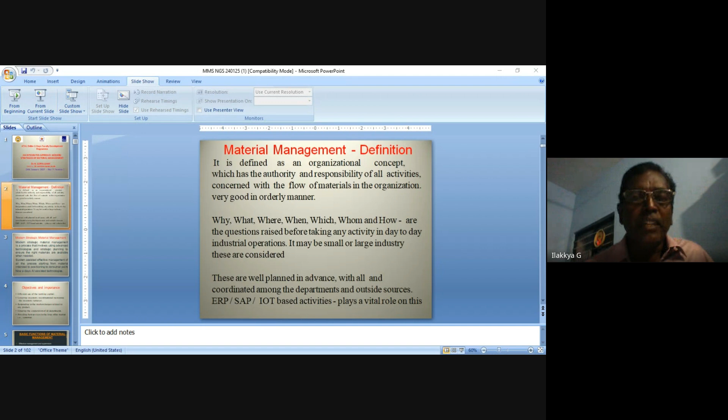Materials management definition: it is defined as an organizational concept which has the authority and responsibility of all activities.

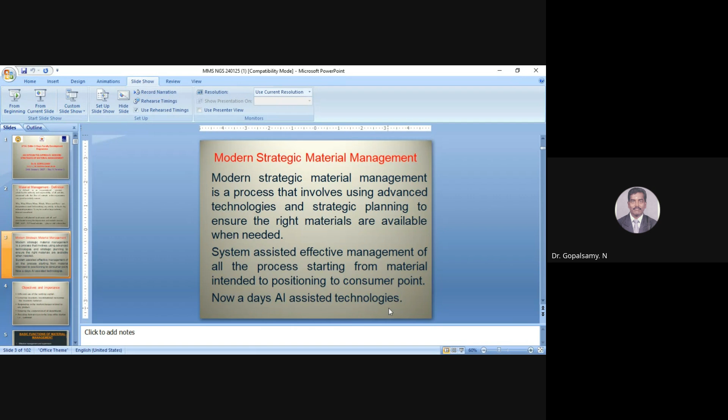Objectives and importance: efficient use of working capital, lowering inventory investment and increasing inventory turnover, responding to market changes related to any product, ensuring cooperation of all departments, and providing best service to the king of the market, that is, the customer is king.

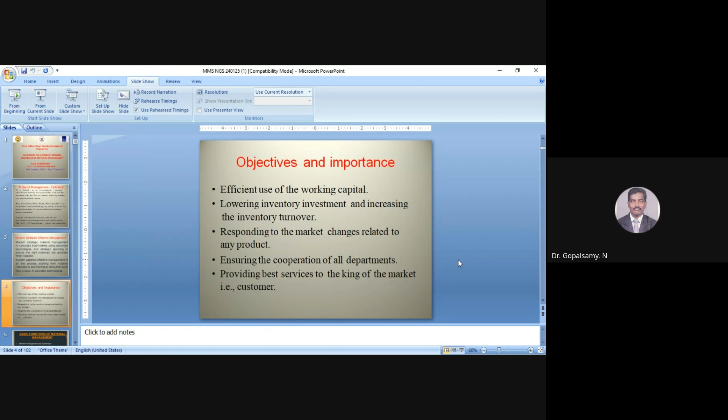Objectives of material management: right price, high inventory turnover, low procurement and storage cost, continuity of supply, consistency in quality, cordial relationship with suppliers, development of vendors, good information system, low storage cost, and good records.

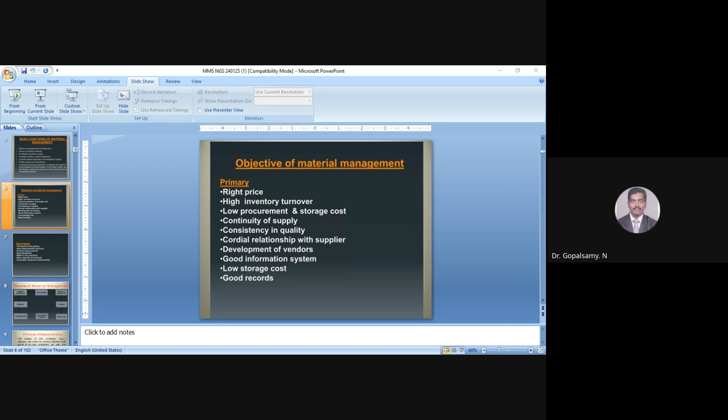Demand estimation: the demands are received from all departments, consolidated together, and given to the materials or procurement department. Procurement is the activity of the materials management department, and it is forwarded to the suppliers through inquiry mode. Nowadays we have many types of inquiries, using email, WhatsApp, Facebook, and advertisements.

Earlier, it was only newspaper and letter correspondence.

Then after procurement comes receipt and inspection. Proper inspection is to be carried out based on specifications and requirements. Only accepted components are to be sent to storage, done by stores personnel in a proper manner through proper records.

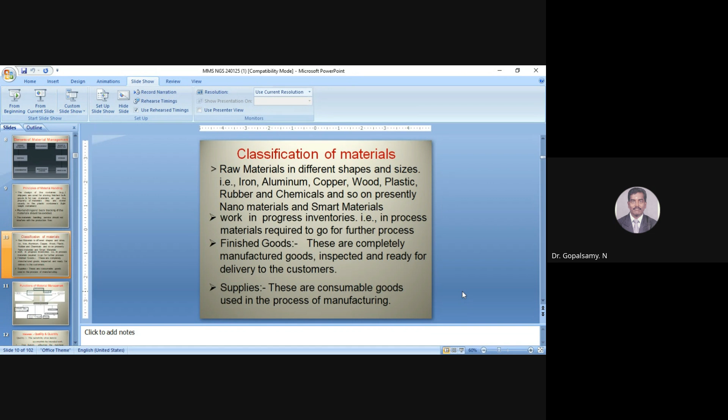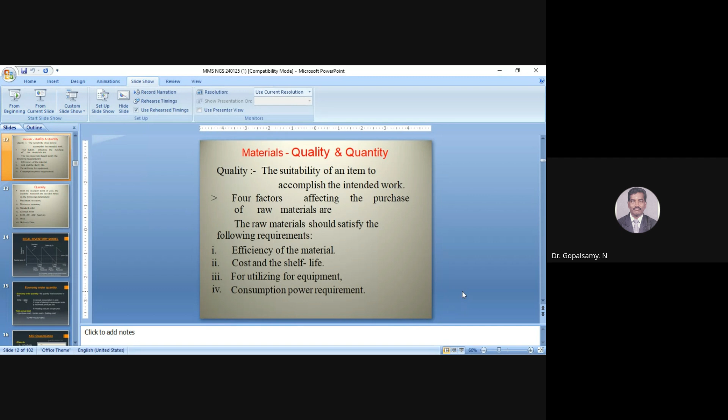Quantity: based on the quantity, maximum inventory and minimum inventory, standard orders, reorder point, economic ordering quantity, just in time, ABC analysis, price and delivery dates. These are the essential terms to be considered defining the quantity.

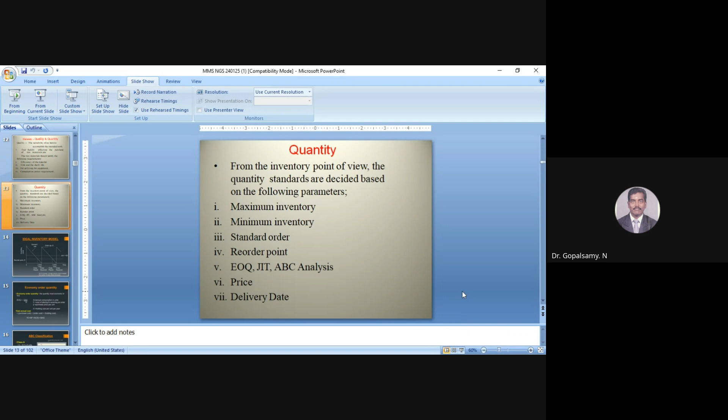Ideal inventory model: this is how much demand is required and when it is to be ordered, what is the reorder point, order placed, what is the lead time for the production, and how many numbers per order to be placed can be accumulated together if the value of the order is small, and all the items to be ordered in a stretch, giving the split deliveries.

Economic ordering quantity: the quantity most economic to buy is decided based on this. EOQ is equal to root of 2AC divided by H. A is annual consumption in units. C is the cost of placing and receiving an order, that is purchasing order, releasing and receiving the order material.

P is purchase price per unit. H is the holding cost per unit per annum. The total annual cost is equal to purchase cost plus order cost plus holding cost.

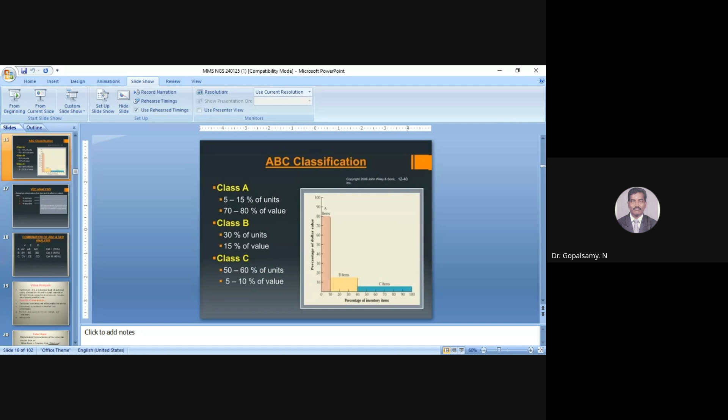VED analysis: nothing but vital item, essential item, desirable. Vital means it's important to be brought in time. Essential, it is a must. Desirable, it may be put or may not be.

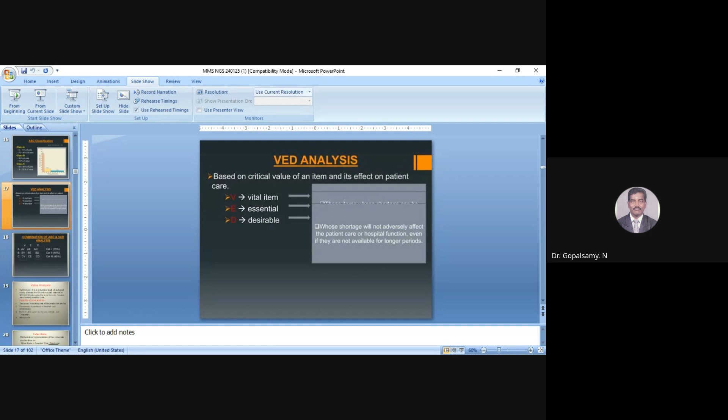Value analysis: it's a systematic study of each and every element of its cost in a part, material or service, to make certain that it performs its function at the lowest possible cost.

Benefits of value analysis: decrease in existing cost of the product or service. Unnecessary expenditure is identified and eliminated. Product value improves for new materials and process, resulting in more profits.

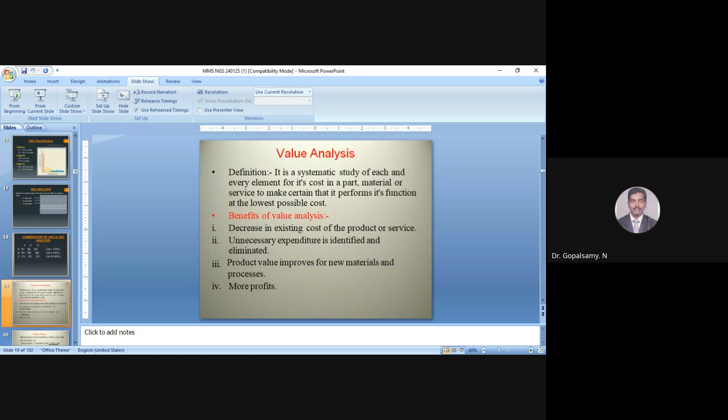In this technique, many number of questions are applied. What must I do? What else does the item do? What does it cost? What else will the job do? What will be the alternative costs?

This is based on the material or component we are going to utilize for the purpose, and for which what I have to do and how much value it yields for the specific operations, and based on this, the value analysis technique is carried out.

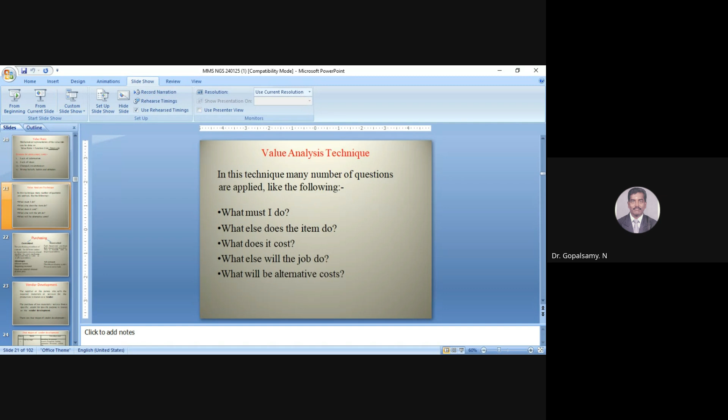Vendor development: any component required to be developed is given to this department, and it is a challenging opportunity for the engineers who will go for vendor development in the materials department.

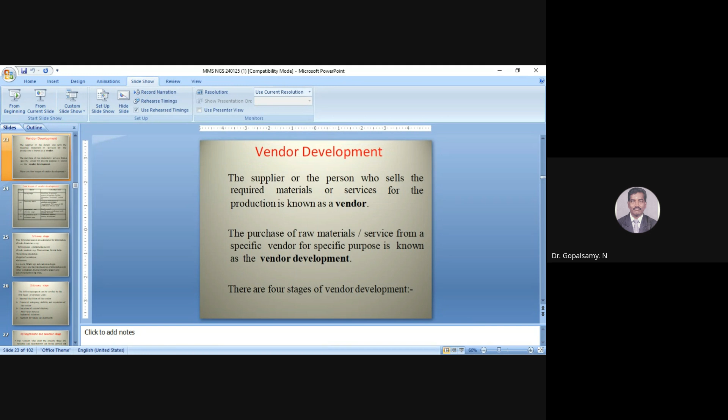The service or sources given to us: four stages of vendor development are survey stage, inquiry stage, negotiation and selection stage, experience and evaluation stage. Survey means identifying the potential sources.

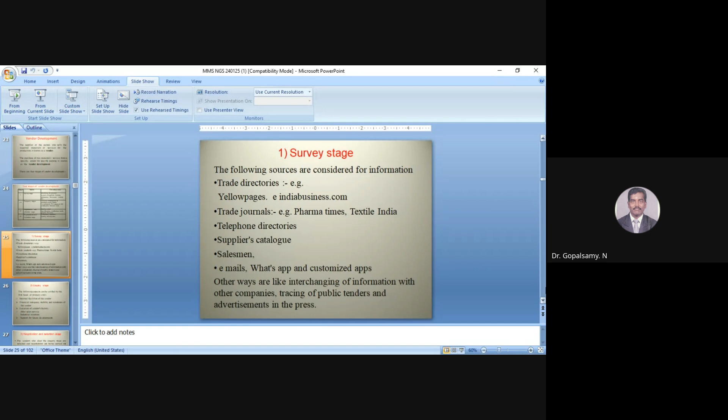Enquiry stage. The following aspects can be verified first-hand at primary visit: internal facilities of the vendor, financial adequacy, stability, and reputation of the vendor. That is, how sound they are to withstand the financial burdens for the suitability and supply to us.

Location of vendor factory, whether it is nearby or far away, how often we can visit, that is to be decided. After sale service, industrial relationships, support for future developments. If any new ideas or components are to be developed, it will be given to the particular specific vendor for the development.

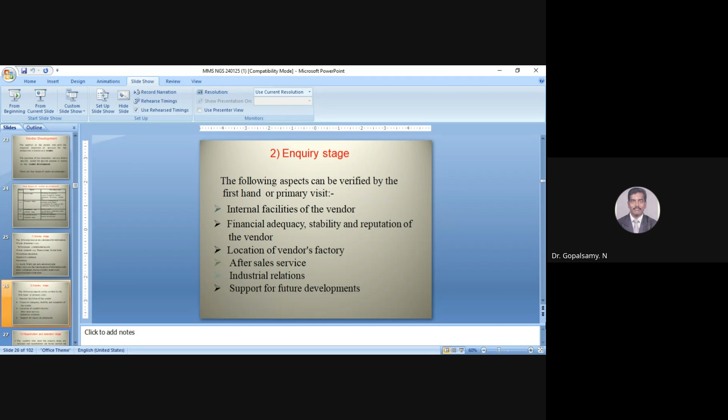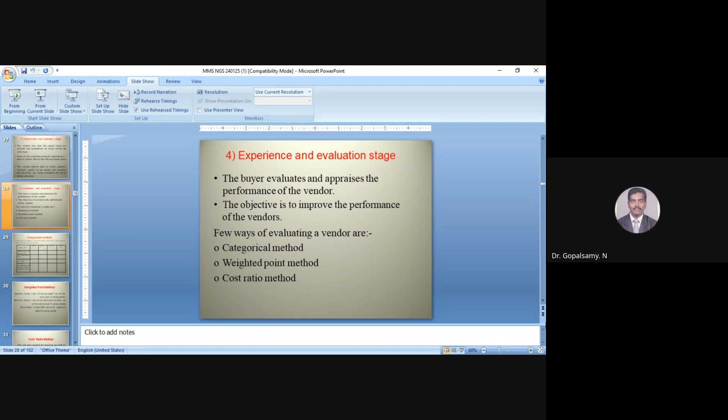Experience and evaluation. The buyer evaluates and appraises performance of the vendor. The objective is to improve the performance of the vendor. A few ways of evaluating vendor are categorical method, weighted point method, cost ratio method. Categorical method is purely decided on the grade point, that is grading factors.

Supplies are as per quantity selected and deliveries are on time. Rigorous follow-up is not necessary and willingness to accommodate when product schedule production suddenly changes is considered. These are graded with always, usually, seldom, never. Point grades are given: 9-8-7 for always, usually 6-5-4 is medium and seldom is the minimum category, then never is 0. The points will be given accordingly and summarized to decide the factors to proceed further on vendor or not.

Weighted point method, that is quantity rating: number of lots accepted per lots received into rating points. Delivery rating: number of lots delivered on time over number of lots delivered, into rating points. Price rating: least offer received over supplier's offer into rating points.

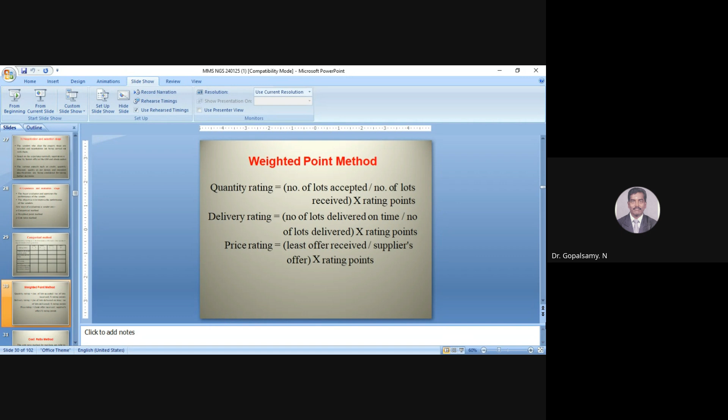This is the cost ratio method. Cost ratio method is where purchase can refer to the cost of sale ratio, the variable cost ratio or cost benefit ratio. This ratio can help determine a company's profitability, the viability of a project, or the cost effectiveness of the purchase.

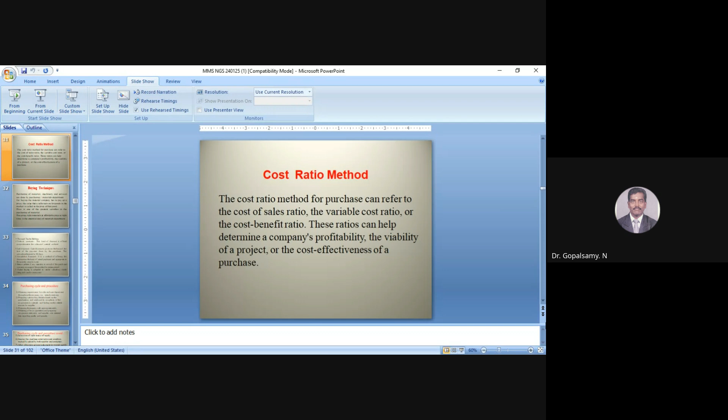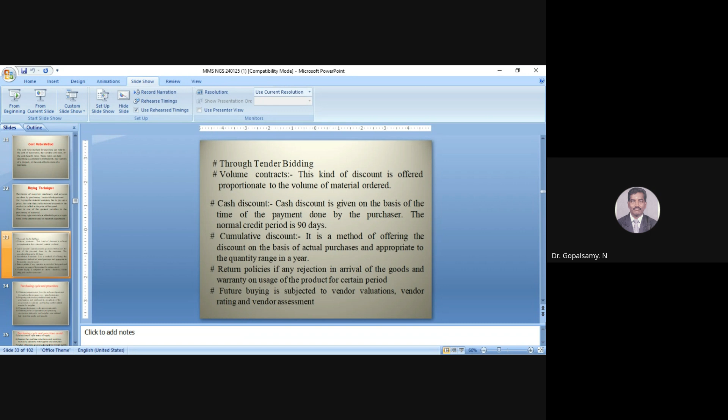Based on the quantity, through tender bidding, volume contracts, cash discount, cumulative discount, return policies, future buying, subject to vendor valuations, vendor rating, and vendor assessments. This cash discount is mainly given.

Purchasing cycle and procedure: obtaining requirements from the user department, that is intends receiving, prepare make or buy decision based on the specifications and needs of the complexity of the components or materials, and finding reliable sources, preparing the inquiry with appropriate needs, obtaining offers or quotations, preparing comparison statements, and supplier-wise statistical data regarding quality and quantity are recorded.

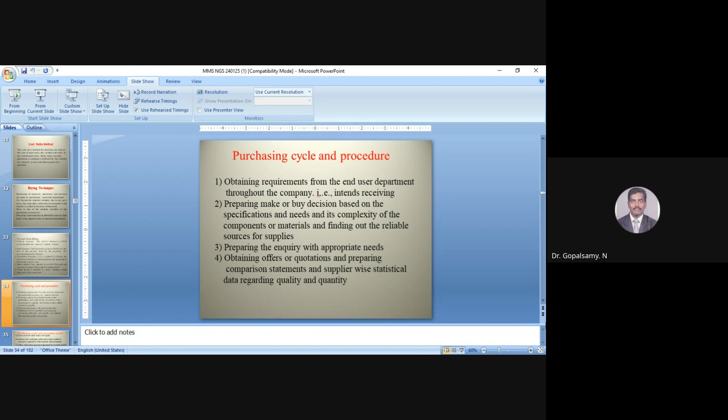That is need recognition. Each and every department will give the requirements with specifications based on the design, and it is given to the materials department through official requisitions.

Specification files and specifications are checked, and further it is sent for inquiry. Based on the inquiry reply received, that is quotations or offers, the supplier will be finalized based on the past history, quality and quantity of supplying, and their finance terms. Based on the purchase, all these records are stored, and suppliers' records are maintained by the materials department.

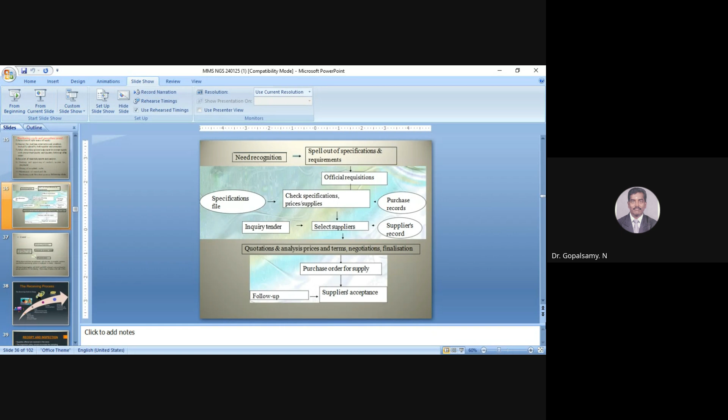The receiving process: the receiving clerk in charge will first, based on the order, give the receipt, check for the quality, and it will be given to the quality control department.

All the things are recorded and submitted to the purchasing department and given for payment. The invoices are sent to the accounts department after the acceptance of the quality.

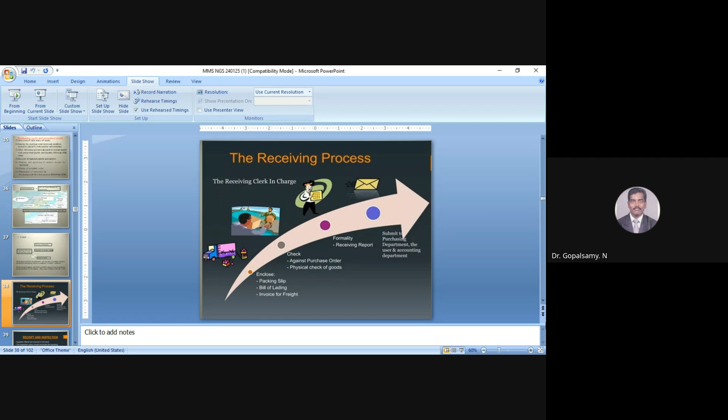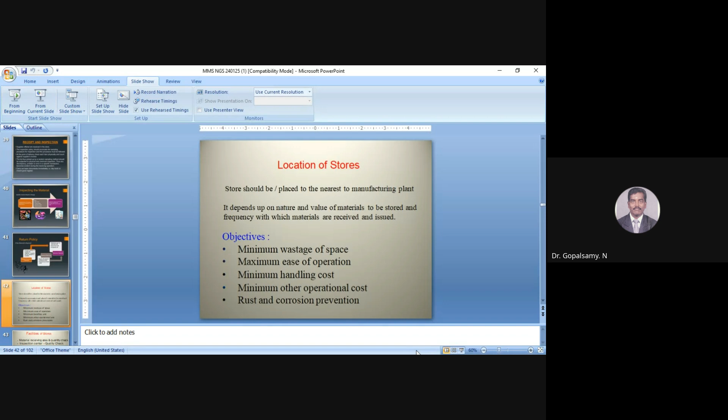Functions of stores - general functions: maintenance of stock, maintenance of hygiene and sanitation, pest control, rust preventive measures, and safety needs. First aid kits with trained personnel and firefighting equipment are maintained with stores.

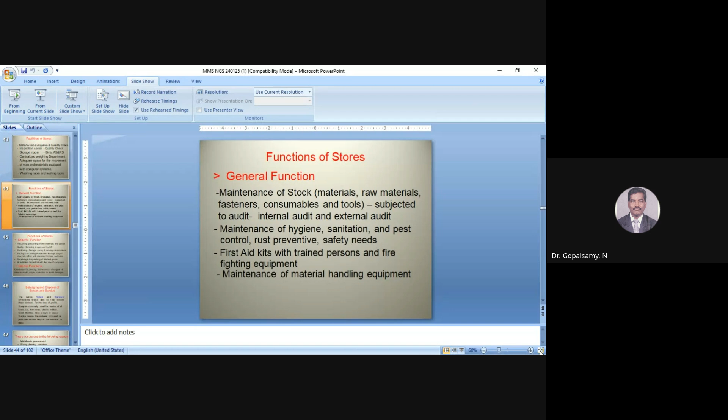Maintenance of material handling equipment. In this, maintenance of stock is subjected to audit.

Some specific functions of stores: receiving and recording raw materials and goods, quality sampling and approval by QC, positioning, storage, array and moving rack systems, issuing and recording of materials through proper channel with standard formats and rules, and receiving and dispatching finished goods.

All these activities are carried out with the use of computers. Optimal functions include distribution, dispensing, and maintenance of weights and measures with proper protection to avoid damages.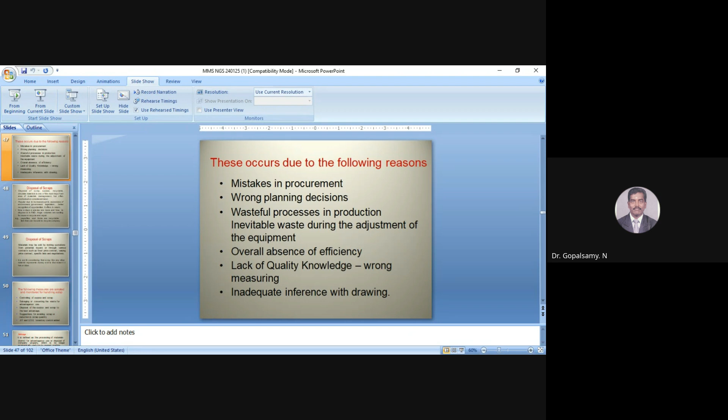loss to the company. Then they will be searching for the component. It's not possible to trace out, so they will go for a new process. Wrong positioning - this is controlled by computer planning. Disposal of scraps.

Surplus, recyclable, obsolete materials are the most important area of materials management, but often overlooked and considered minor. Popular due to increased public awareness of environment, government legislation, and better recognition opportunities it offers in return. Nowadays, e-waste is more, and how to dispose is in R&D. Huge volumes are waiting for reuse, recycle, or repair.

Example: paper files and forms are recyclable items that can be sold to recycle companies. Plastic wastes are used for recycling. Disposal of scraps: metals may be sold by inviting quotations from potential buyers through various contracts such as fixed price contract, varying price contract, specific bids, and negotiations. It is worth considering that scrap, like any other material, represents money, and to that extent it has value.

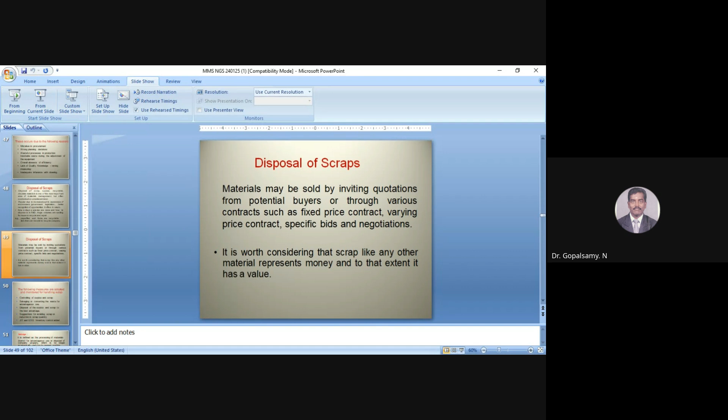Disposal is the main activity in the area of the stores department, mainly concentrated on this. The following measures are adopted: monitored handling of scrap, controlling of surplus and scrap, salvaging and converting waste for advantageous use, disposal of surplus scrap to the best advantage, suggestions for avoiding scrap or reduction in scrap quantity.

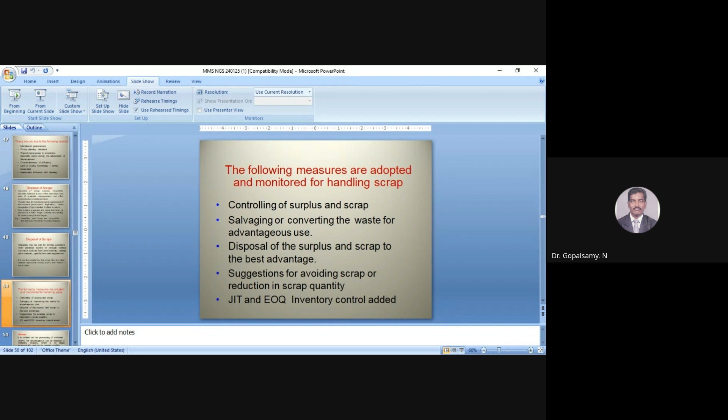JIT, EOQ, and inventory control are added. Just in time and economic order quantity play a vital role. Salvage is defined as the processing of materials for advantageous use or disposal by a company properly. It is no longer economically useful in its present position, so it is to be salvaged.

Salvage operation: waste materials are properly collected and stored in one place continuously so that these can form a separate batch in production. Recoverable materials are stored in a scientific way. Other items are stored too. How to go for salvage? That is the material handling system.

It involves handling, storing, and controlling material movements with proper records. The raw materials, in-process materials, and finished goods are moved from one place to another inside the plant with proper records. It adds value through time and place utility. It impacts space requirement, profits, quality, safety, and productivity.

On an average, 20% of the production cost is spent on the material handling system. Mainly, material handling is the main activity. Any movement of materials is performed or done by this material handling system.

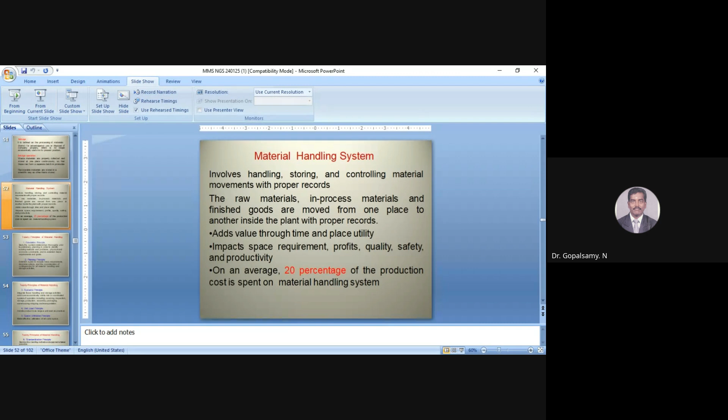Nowadays, technologies are improved with automated vehicles and remote control vehicles. More logistics methodologies are followed. The transfer system line is also there.

20 principles of material handling. Orientation principle: study the system relationship thoroughly prior to preliminary planning in order to identify existing methods and problems, physical and economic constraints, and to establish future requirements and goals. Planning principle: establish a plan to include basic requirements, desirable options, and the consideration of contingencies for all material handling and storage activities.

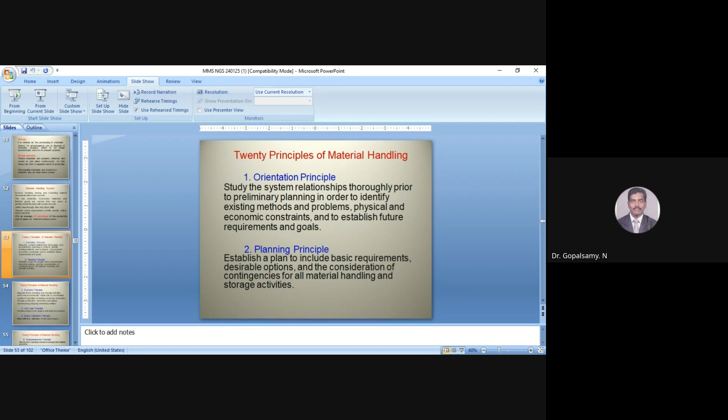These principles are important for us. Systems principle: integrate those handling and storage activities which are economically viable into a coordinated system of operation, including receiving, inspection, storage, production, assembly, packaging, warehousing, and transportation.

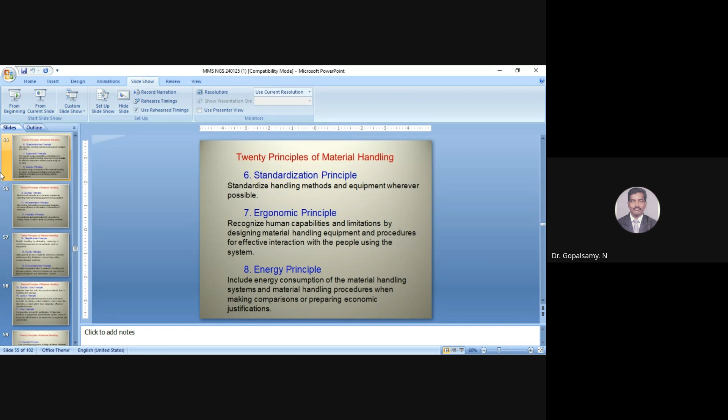Ergonomic principle, that is easiness or comfort to the human: recognize human capabilities and limitations by designing material handling equipment and procedures for effective interactions. Energy principle: it includes energy consumption of material handling systems and procedures when making comparisons or preparing economic justifications.

Nowadays, energy consumption is minimized. Ecology principle: minimum adverse effects on the environment when selecting materials, handling equipment, and procedures. Mechanization principle: mechanize the handling process where feasible to increase efficiency. Flexibility principle: use methods and equipment which can perform a variety of tasks under a variety of operating conditions.

These things are main. The flexibility principle is mainly added in FMS, flexible manufacturing system. It should accommodate all the components and all the activities.

Simplification principle: simplify handling by eliminating, reducing, or combining unnecessary movements. Gravity principle: utilize gravity to move materials wherever possible while respecting limitations concerning safety, product damage, and loss.

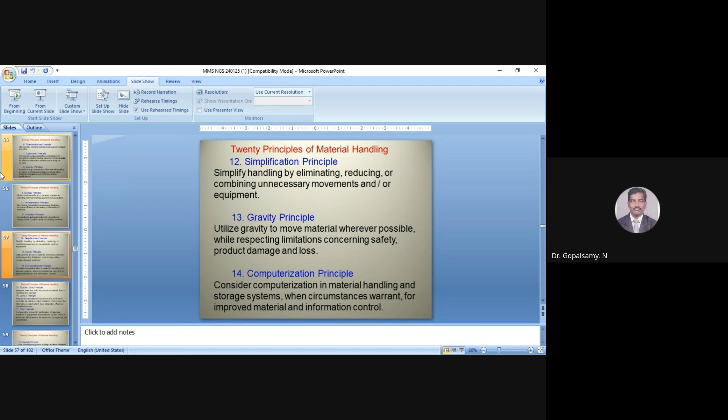Computerization: consider computerization in material handling and storage systems when circumstances warrant improved material and information control. EDP or ERP, SAP systems are done based on the requirement, and material handling is also linked together for the movement of materials. System flow principle: integrate data flow and physical material flow in handling and storage systems.

Layout principle: prepare operational sequence and equipment layout involved with a viable system, and then select the alternative system that best integrates efficiency and effectiveness.

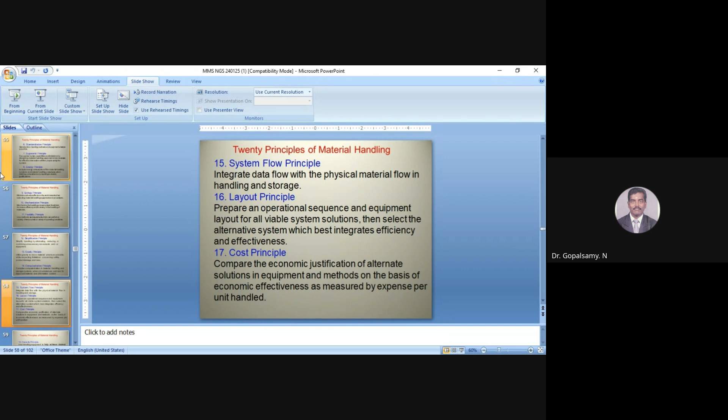Overall equipment effectiveness is also a must. Cost principle: compare economic justification and alternate solutions in equipment and methods on the basis of economic effectiveness, measured by expenses per unit handled, that is, per unit how much it costs for movement. Capacity principle: use handling equipment to help achieve desired production capacity. Performance principle: determine effectiveness of handling performance in terms of expense per unit handled.

Safety principle, it is the main thing. Suitable methods and equipment for safe handling, for the safety of men and materials, are required. It's a main essential thing for any operation of the company.

Handling of materials must be performed safely, efficiently, at low cost, in a timely manner, accurately, with the right materials in the right quantities to the right locations, and without damage to the materials and personnel, with proper records of movement.

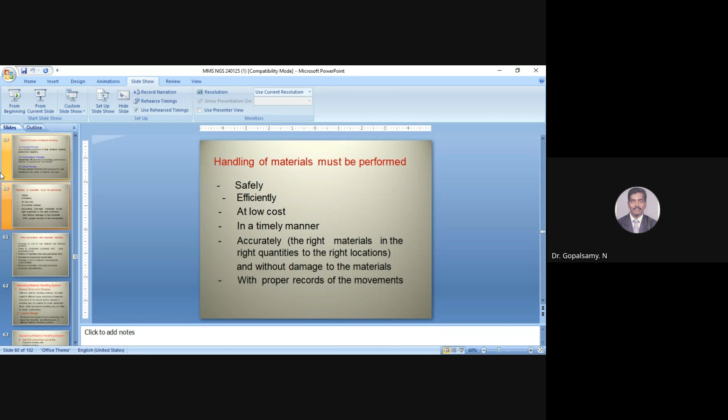Risks associated with improper handling: increase in cost of raw materials and finished goods, delay in production schedule and long production cycle, waste of machine time and personnel time, increase in in-process inventories, dead inventories - that's called dead inventories - and damage or loss of materials, employee and safety liabilities, employee frustration and reduced morale, customer dissatisfaction.

Because of delay, the customers are dissatisfied. Hence, improper handling leads to loss to the company.

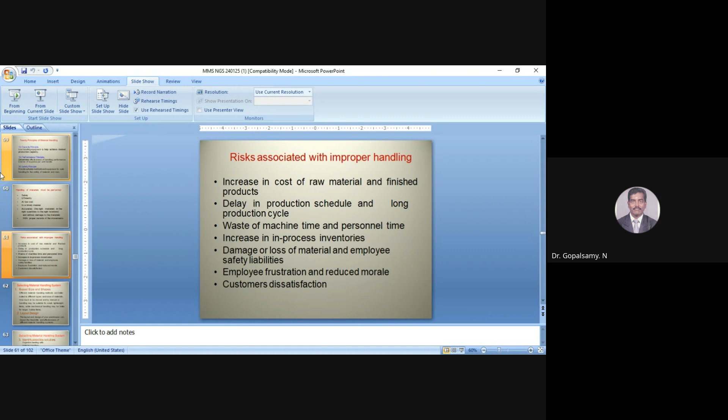Selecting a material handling system is based on size and shape, and layout design. Different material handling methods are suited to different types of sizes and types of materials - how much is to be carried, whether it is small or lightweight, or larger or bulkier, or liquid or solid, or any other sections.

Layout design: the layout and design of the warehouse can impact the feasibility and effectiveness of different material handling systems. Many layout methods are there.

Identify possible solutions by organizing a meeting with the material handlers, machine operators, supervisors, and support engineers. Evaluate alternatives by meeting again to rate the alternatives and consider future plans and growth potential. Then how effectively the material handling system is to be utilized can be analyzed with the evaluated alternatives.

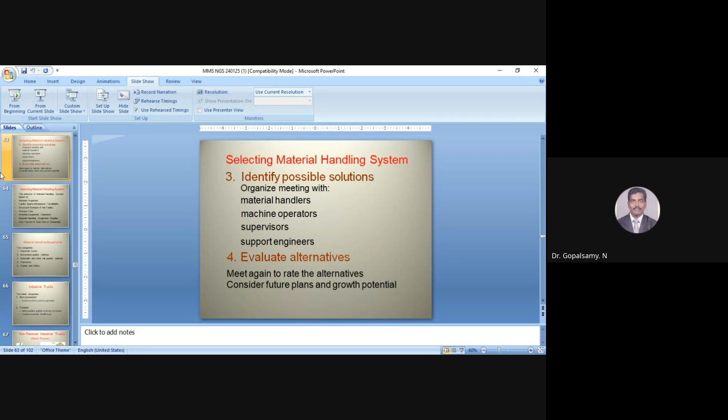Selection of material handling system is also based on material properties - shape, size, chemical and physical properties, powder or liquid - and facility space allowances and availability, that is, how many square feet are available for utilization is to be decided, along with structural strength and facility, and how the process flow is to be carried out or decided.

Intended equipment operations and the material handling equipment supplier - based on the supplier, it is decided whether they have vast experience or not. Cost factors and total cost of utilization, that is, how many rupees are to be invested in this.

Material handling equipments fall into five categories: industrial trucks, automated guided vehicles, monorails and other rail-guided vehicles, conveyors, and cranes and hoists. Nowadays we have more remote control and automatic rail system movements for material handling. Transfer lines are also there for performing operations in continuous process industries.

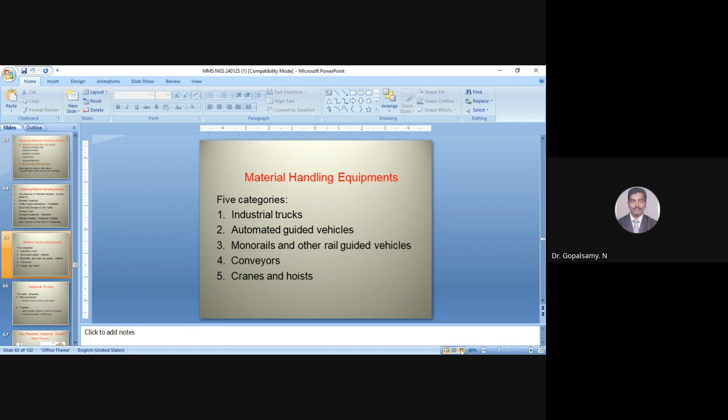Industrial trucks have two basic categories: non-powered and powered. Non-powered works with human effort, pushed or pulled. Powered trucks are self-propelled, guided or driven by humans. Common examples are forklift trucks and automatic guided vehicles.

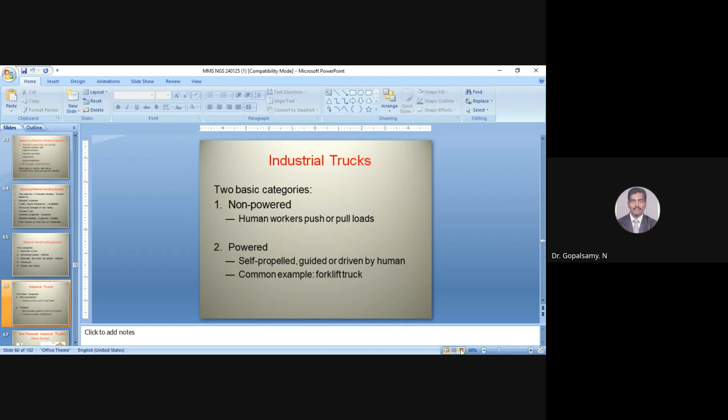Non-powered industrial trucks include the two-wheel hand truck, four-wheel trolley, and hand-operated low-lift pallet truck. Powered trucks are designed to pull one or more trailing carts in factories and warehouses, as well as airport baggage handling, powered by onboard batteries and IC engines.

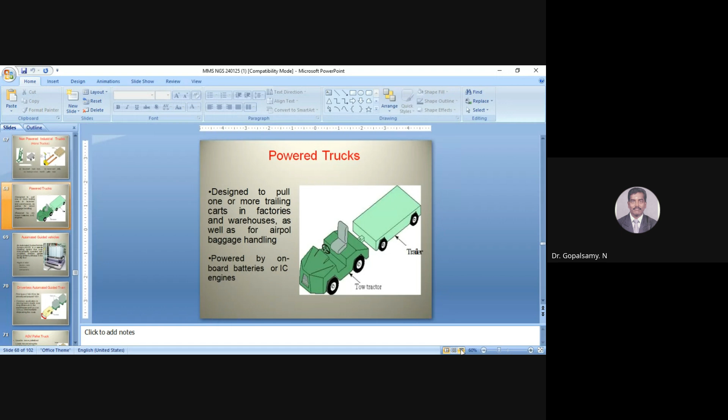AGV, automated guided vehicle, is a material handling system that uses independently operated self-propelled vehicles guided along defined pathways on the facility floor. Types of guideway AGVs include driverless trains, pallet trucks, and unit load AGVs.

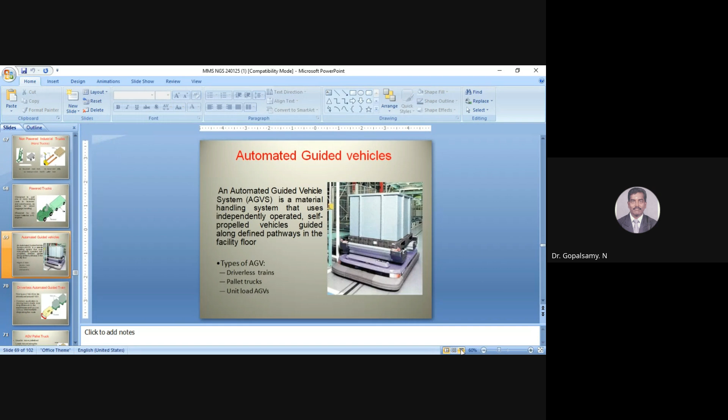This plays a vital role. The driverless automated guided train was the first type of AGV introduced around 1954. Its common application is moving heavy loads over long distances in warehouses and factories without intermediate stops along the route.

AGV pallet trucks are used to move palletized loads along predetermined routes. The vehicle is loaded with a pallet by a worker, the pallet is then elevated from the floor, and the worker drives the pallet truck to the AGV guide path and programs the destination.

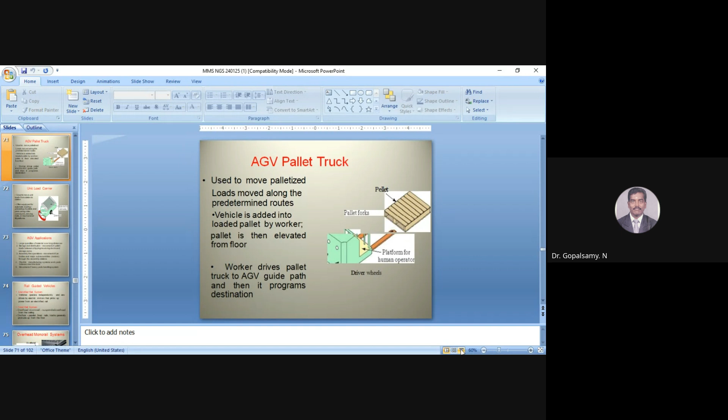Automated guided vehicle unit load carrier: how much load is to be carried by the vehicle is decided. It is used to move unit loads from station to station, often equipped with automatic loading and unloading of pallets and pans using roller conveyors, moving belts, or mechanized platforms.

AGV applications include moving large quantities of materials over long distances, storage and distribution, movement of pallet loads between shipping and receiving docks, assembly line operations, movement of car bodies and major assemblies, flexible manufacturing systems (FMS) moving work parts between machine tools, and movement of heavy parts handling systems.

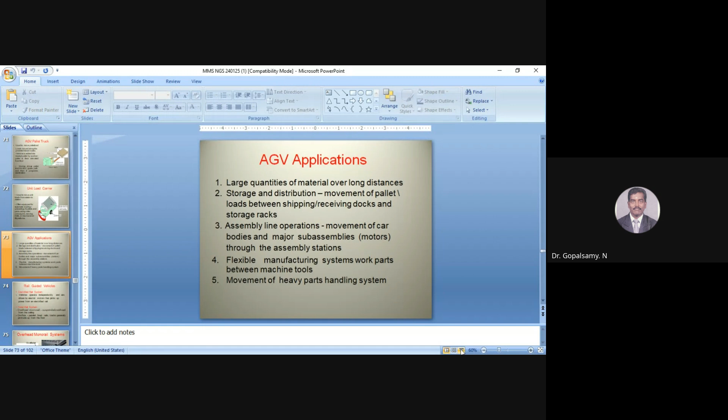Rail guided vehicles include electrified rail system and fixed rail system. The vehicle operates independently and is driven by electric motors that pick up power from an electrified rail. The fixed rail system includes overhead monorail and on-floor parallel fixed rails, suspended overhead from the ceiling, or tracks that generally protrude up from the floor.

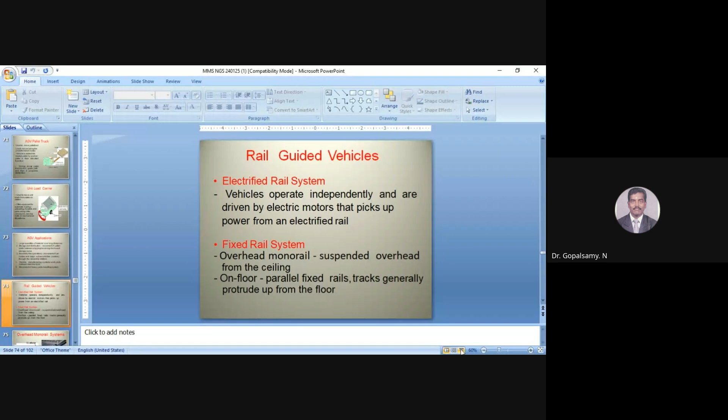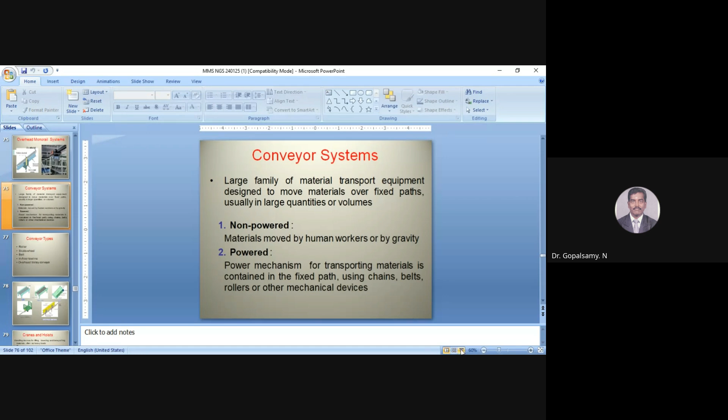Conveyor systems are a large family of material transport equipment designed to move materials over fixed paths, usually large quantities or volume. Non-powered conveyors are moved by human workers or by gravity. Powered conveyors have the power mechanism contained in the fixed path, using chains, belts, rollers, or other mechanical devices. This includes bulk handling, with types of conveyors such as roller, skate-wheel, belt, in-floor tow line, and overhead trolley conveyor.

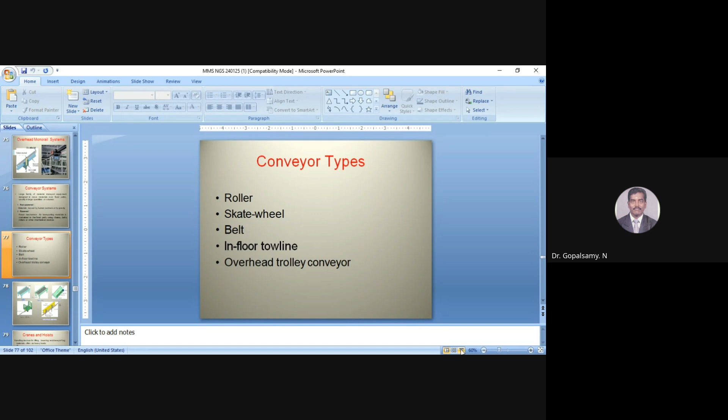Cranes and hoists are handling devices for lifting, lowering, and transporting materials, often heavy loads. Cranes are used for horizontal movement of materials, while hoists are used for vertical lifting. Cranes usually include hoists, so the crane and hoist combination provides horizontal transport along with vertical lifting and lowering.

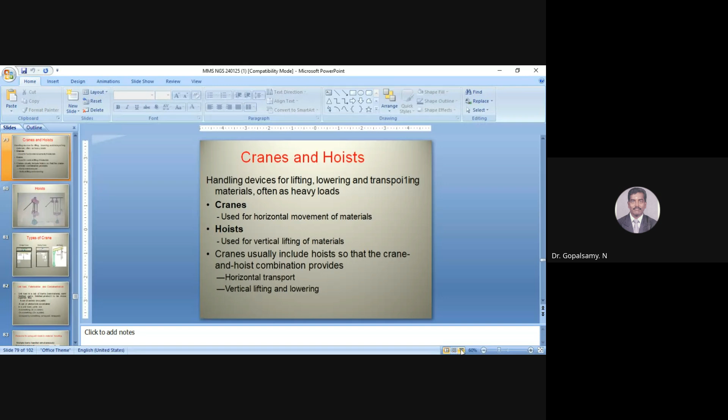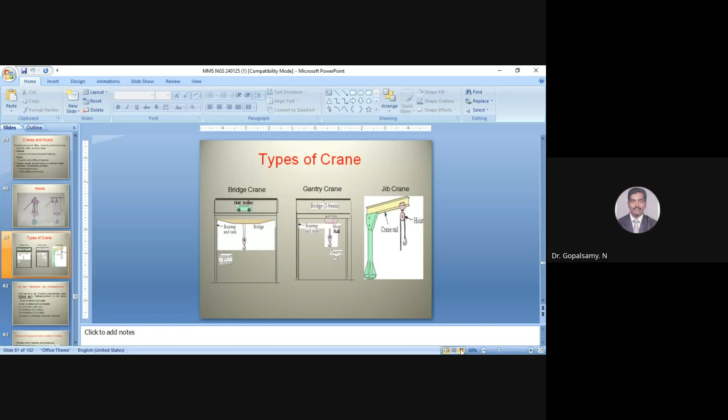Types of cranes include bridge crane, gantry crane, and jib crane. The figure shows the concept of these cranes, mostly used for lifting and transferring materials from one place to another.

Unit load, palletization, and containerization. A unit load is a set of items - raw material, semi-finished good, or finished product - to be moved together, such as a set of cartons on a pallet or a set of products in a container. In a unit load, parts are grouped, wrapped, or strapped together for movement through the material handling system. These parts are packed neatly for proper utilization and moving from one place to another.

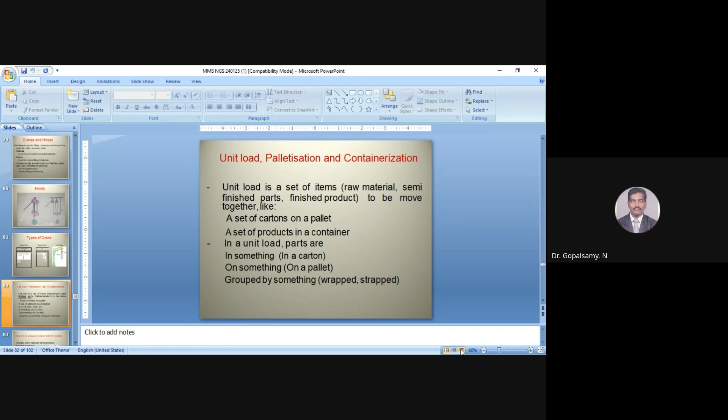Pallet style and size are based on shipping and receiving restrictions, size and weight of items on the pallet, and space restrictions based on square feet to be handled. Other considerations include equipment used to move the pallet, cost, supply and maintenance, aisle widths and door sizes, and stacking heights.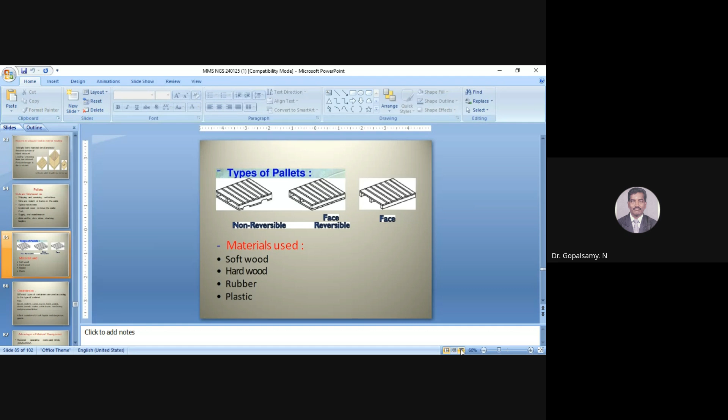Advantages of materials management include reduced operating costs and timely production, and greater job satisfaction on the part of both workers and employer, along with effective utilization of resources in an orderly manner. Proper planning is done regarding which material to use, where and how, and all the things are sequenced.

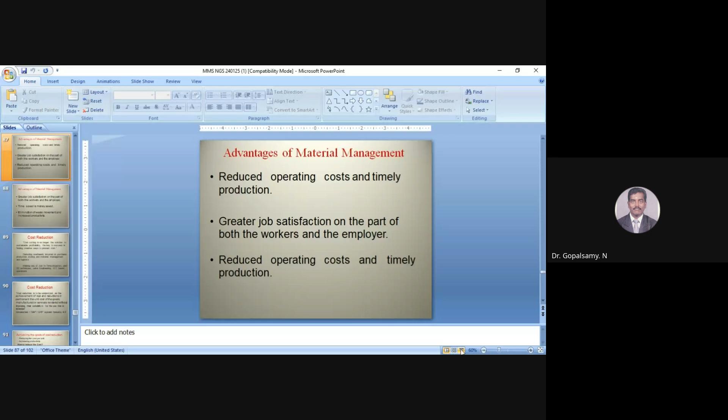Advantages of materials management also include greater job satisfaction for both workers and employer. Time saved is money saved, and there is elimination of waste movement and increased productivity.

Cost reduction: cost cutting is no longer the solution to sustainable profitability. The key to success is finding creative ways to prevent cost, reducing overheads in purchase, production, storing and materials management, logistics, making use of just-in-time inventory and 5S techniques, value engineering, and IoT-based operations.

Mostly nowadays, Internet of Things is adapted for the latest industrial manufacturing.

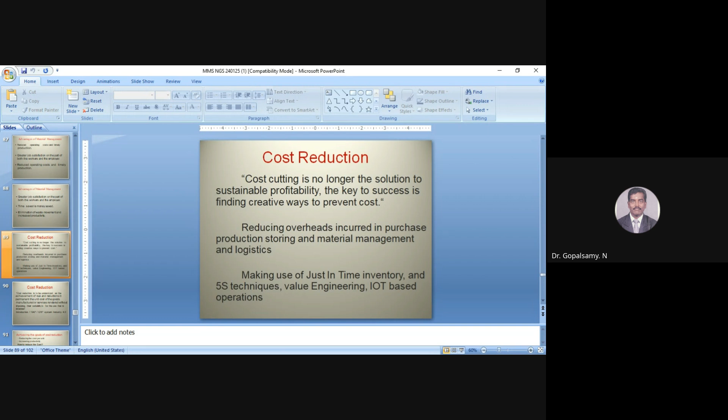Cost reduction is the main activity. It is to be understood as the achievement of real and permanent reductions in the unit cost of goods manufactured or services rendered, without impairing their suitability for the intended use. Introduction of SAP ERP systems and Industry 4.0 are added together.

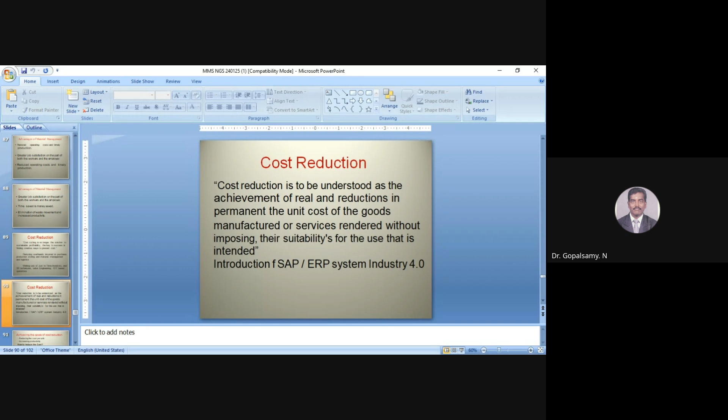Achieving goals of cost reduction means reducing cost per unit and increasing productivity. How to reduce the cost? By elimination of waste, improving operations, increasing productivity, using cheaper materials without compromising quality, and improved standards of quality.

The cost reduction process involves analysis, examination, developing solutions, selecting a solution, and implementing the solutions.

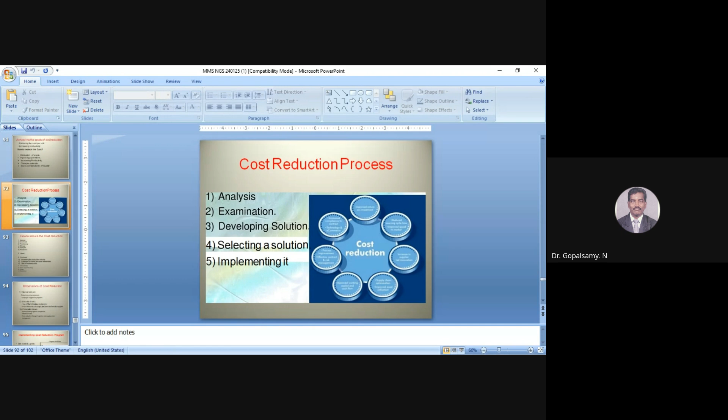How to reduce cost? That is material overheads, purchasing, storage, transportation, production. These overheads are to be reduced. Labor and overheads, increasing the production volume, extension of market and price differentials, size of the business unit, outsourcing, that is BPR or BPO, and sales and marketing, energy production.

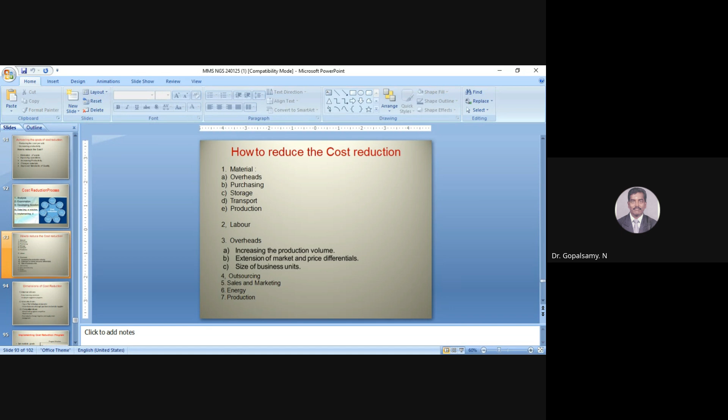So these are the things for cost reduction. Dimensions of cost reduction: internal driven, externally driven, competitive driven. Internal driven is nothing but keep improving processes, employer satisfaction.

Externally driven: top of the technology and process reduction through purchase and vendor supplies. Competitive driven: benchmarking against the competitors, real-time data, cost reduction through logistics and supply chain management. That is, computerization of all these activities is done for better cost reduction and effective utilization of the equipments.

Implementing cost reduction program, the schematic diagram shows: set realistic goals, develop the cost reduction program, consult all, perform return on investment analysis, explore the options, not only BPR or modern technology, consider offshoring and outsourcing.

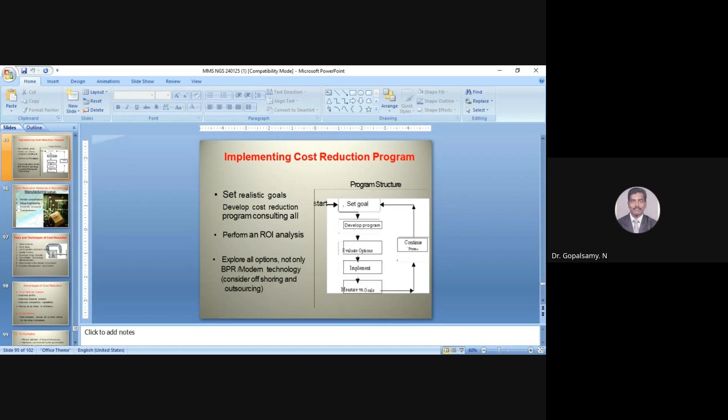This cost reduction implementation shows materials in manufacturing, vendor consideration, value engineering, assembly outsourcing, standardization. For proper manufacturing setup these things are considered, and effective utilization of the equipments is carried out.

Tools and techniques of cost reduction: value analysis, work study, job evaluation, merit rating, quality control, EOQ that is economic order quantity, use of better technology, standardization, improvement in the design of a product, inventory management and control. These are the tools and techniques required for cost reduction, mostly employed in many varieties of companies nowadays.

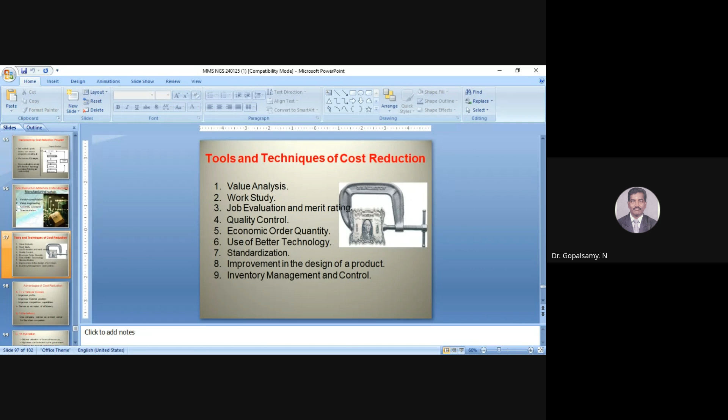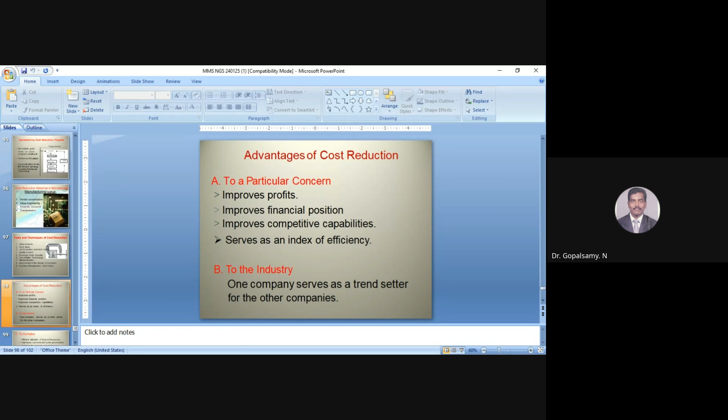To the industry, one best company serves as a trendsetter for other companies. Comparisons will be done. How best this is compared to other companies is decided based on the cost reduction.

Conclusion: hope today's session is somehow helpful to us, and you have known about materials management, including purchasing of materials, stores management, materials handling system, scrap, salvaging, disposal, and cost reduction.